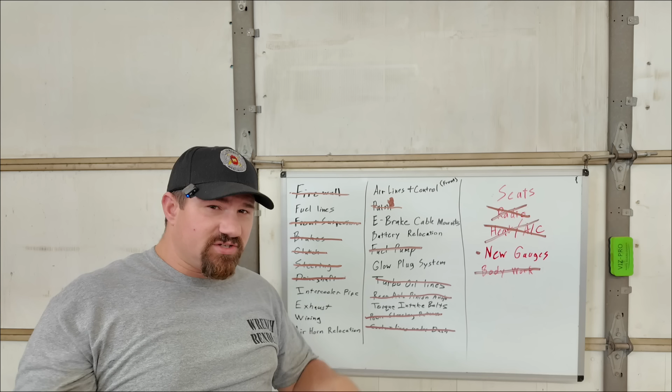So this list isn't looking too bad, but there's more stuff if we get down to the nitty gritty. So we're going to talk about this list. I'm going to give you a walk around of the current condition of the truck and what we're doing, and we're going to make a new list. So here we go.

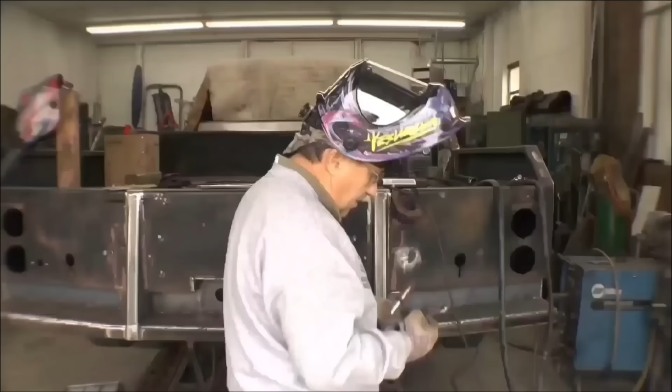Right now I'm in the garage trying not to lose my mind with everything I've got going on. There's a bunch of stuff that needs to be finished up, and obviously we're not there yet. I'm working on a bracket over there. I've been busy working so much and haven't been filming a whole lot because I'm trying to get stuff done in a time crunch. I need to remember I have a YouTube channel and people want to keep up with what's going on, so I'm going to walk around showing you guys a few things that are currently happening. We're going to talk about the list and make a new list.

So this right here, and this right here, is just as a guide. This isn't part of the bracket. I'm just kind of using it to... I got to make a battery bracket.

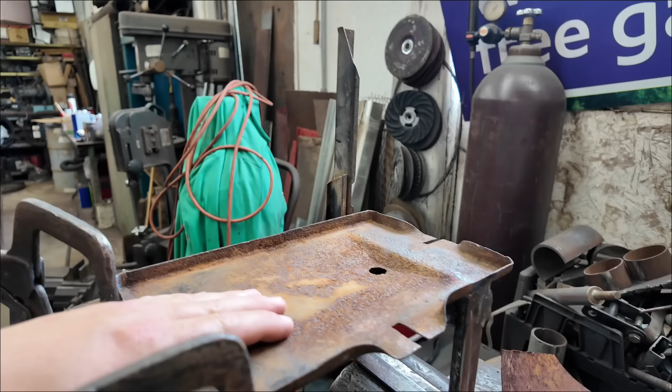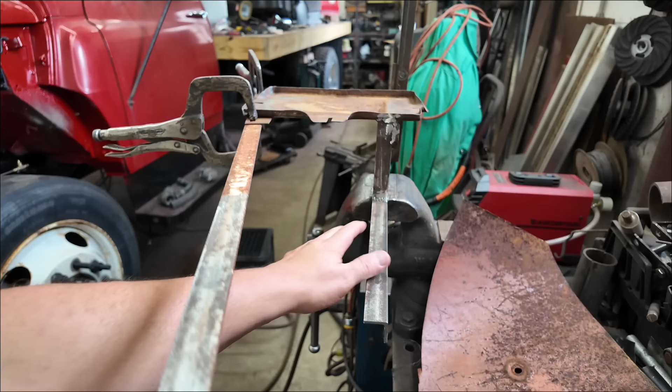Now when I say battery bracket, this is the tray of the original battery, and I'm actually going to leave it - we're going to reuse this tray. But down here I'm going to make another tray that sits down in the... well, imagine this is the line of the hood right here, and that's what this is up here for. I'm going to make another tray that sits just down inside of that, about 5 inches lower than the old battery. And that way I can set 2 batteries right there in that corner.

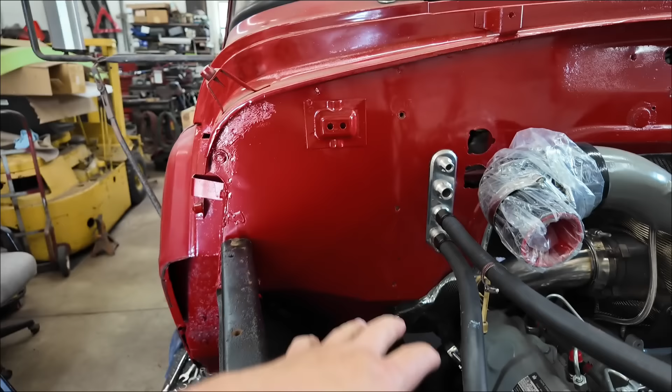To give you an idea where that corner is, that corner is right here. So old battery up here, new battery right here - they're both new batteries - and then this right here will tie up like that to keep it from being in the way. And then I'll have 2 batteries over here to run the diesel engine.

I went to put injector lines on and found out that the rubber boot I had for the turbo intake is too big and it's going to be a problem. So that can't happen. I had to make a turbo hat, and that garbage I made is because I should have clocked the turbo, and I can't go back and change that now. That turbo hat's out there on the ladder, dry, and I painted it black. Yeah, so I'll be running the air filter that came off my Duramax.

So yeah, I got my return lines all done for the injectors. I don't have the injector lines on because I can't right now until I get that turbo hat on, and I can't put the turbo hat on until I get a new one of these. This one's too big - it's serving the function right now, but as you can see, it's bottomed clear out. It's just not going to work, and as a matter of fact I can still turn that in there, and that clamp shouldn't let me do that.

So I've got a different one of these coming to get this on here to stay. And then that will kind of run up like that, and this boot right here is going to turn up a little bit and come over and send the intercooler line down in this corner. A lot going on with the intercooler thing, and I'm not sure how this is going to go. I may end up changing a lot of this later on. We'll see.

Fighting the battle on hydro boost because I got this one to work. This is my return - I need to change that end of it down there. I am not happy with it at all. It's kind of rubbing the frame and it's too tight there. So this right here is just a rubber line that goes into here, and I need to change that some.

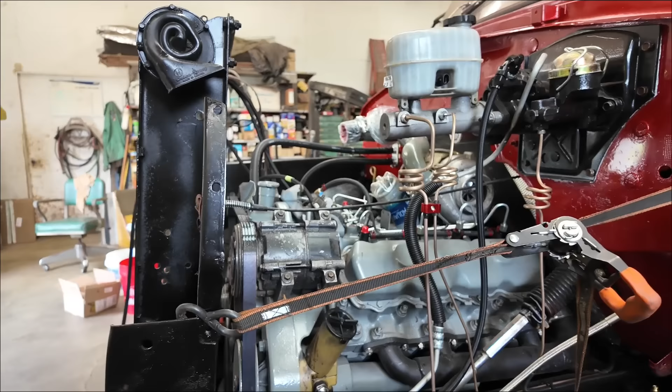So all this is coming together. The brakes are done - I think I went over that in a previous video. The air lines still aren't done yet. I'm going to have to drill holes up in through here to put the air lines in, that way I can get them in the cab for my pressure gauges. And then the other lines will run back under the cab because I've actually still got my manifold that's under the seat, and we're not going to open the cab right now.

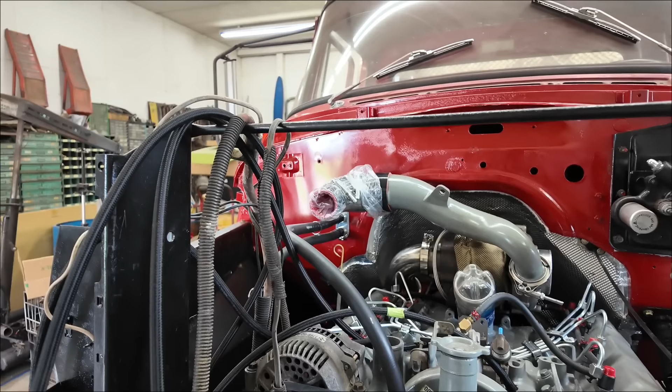What else we got going on? I'm waiting on that, I'm waiting on that. Right now I'm waiting on a hose for this. I kind of re-welded this in down here, and it's going to come out through here into my radiator, and that's going to be a whole different problem.

I've got some 90 fittings coming for the fuel pressure regulator, which I've got mounted in here. That's why all these hoses are hanging here. I've got to put two fittings, one on each side here. Actually, you can do it with one and tee it, but I'm going to do one on each side, and then my return through the bottom. That's what these are - my pressure and return from the tank.

I need to go ahead and cut that fender out right there. It's actually too tight, so I want to cut that and grind it down smooth and make it nice. Then I'm going to put a cover over top of those lines. You can see that they run alongside the outside of the frame down through there. So it's going to work out all right.

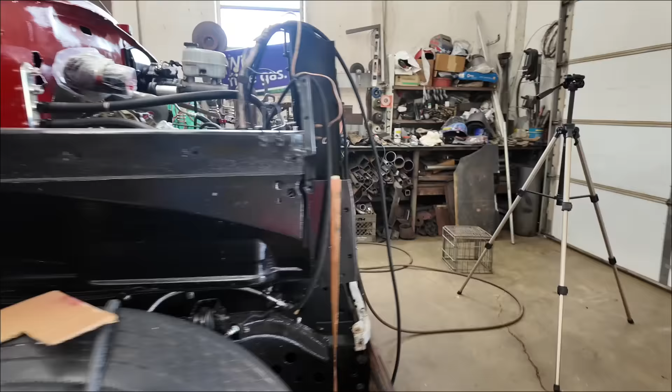I'm using the original Loadstar tank that we had. There's my fuel setup all plumbed in the way it's going to be, with the pump and everything. I don't have it wired yet, so that needs to be wired. The tank fill is still right here on the outside of the truck. Where this was gasoline, this will now be diesel, so it's a draft tube. It doesn't care - the tank's been cleaned out and dried out for a while now. We've had it empty and blown out. It's been empty for months. It'll be fine.

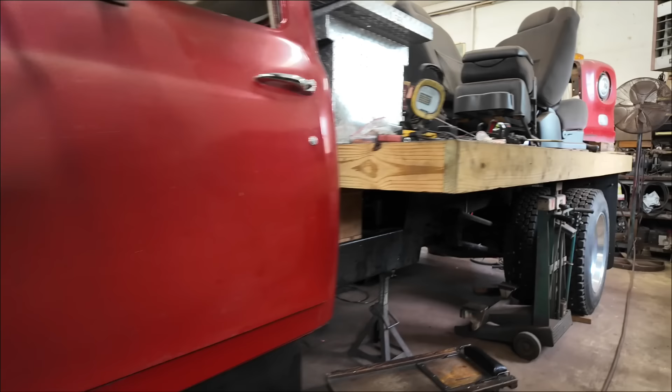Something I didn't get on film because I was kind of quick trying to get it done - come underneath here for a second. Got my name there on the drive shaft, because we now have a balanced two-piece drive shaft with a modern carrier bearing that actually connects to the dump truck transmission and comes back and connects to the GM one-ton axle. So definitely excited about that.

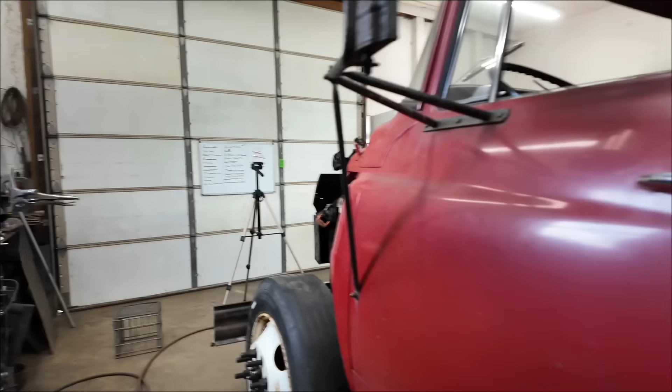That's a Driveline 1 in Columbus, Ohio - they hooked me up there, got that built for me. Them boys didn't ask a whole lot of questions. I said, I got this monster U-joint, and we're going to try and get this done, made this way. And they went, okay. So we're going to take a minute and look at the list.

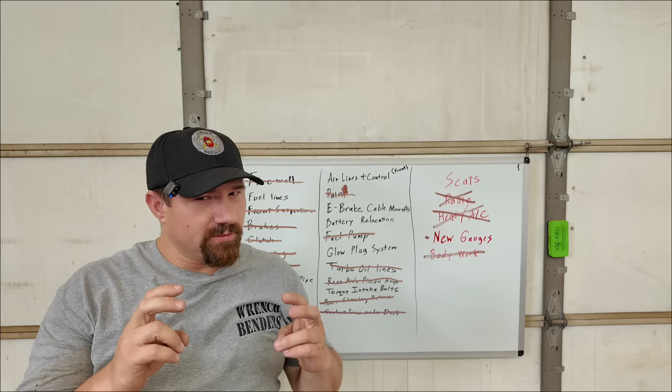I have worked pretty steady for the last little bit, and as you can see, a lot of these things are marked off here. But it's getting so busy that now I'm losing my place, and I need to add a few things to this because I'm afraid I'm going to forget some stuff. I need to mark which ones have to get done for the trip. Some of them seem kind of not real important, like they shouldn't take that long, but they need to happen. So let's see here, movie magic...

Okay, that looks a little better. Now that we've got a bunch of the other stuff off here, it's not as busy - we can see where we're at. I've got the new gauges. Dad did cut the sheet metal for the panel, so I've got them to really fit. I don't have any of the wiring to them done.

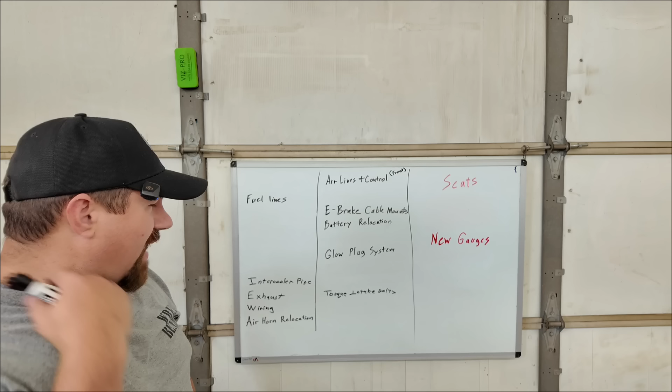Seats - I wanted to slightly modify, but we have to put them back in if we don't do anything else. Airlines and controls for the front - the back's still pretty well done, I didn't change any of that, but the fronts need to be completed. I got to make the e-brake mounts. The battery relocation I'm working on. The glow plug system needs to be made.

Torque intake bolts - I erased some of that, messing up, oh no, I'll have to write that back. I know that seems kind of minor, but when we get to the point where we've got the brackets built off of and everything, we're going to torque those bolts and make sure they're torqued. Because if I forget to do that, that would be bad. Right now it's the only thing on the engine that's not torqued to spec.

Air horn relocation, I've started. Wiring is obviously a big deal. Exhaust - I've got most of the pieces for that. Intercooler piping is going to be a disaster. And fuel lines aren't done yet.

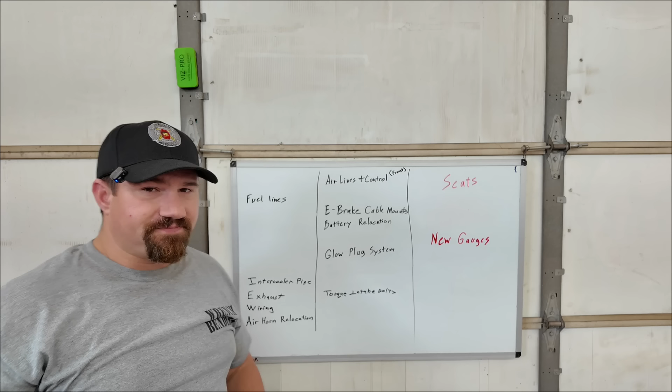So now I need to add some stuff to this list. Okay, so I've added a few things, cleaned some stuff up. The seats are over here because I had them over there because we might modify them. But even if I don't modify them, they have to go back in. Fuel line's got to be finished.

Sensor wiring - this is oil pressure, water temperature, pyrometer, boost gauge, which the boost gauge is not really wired, it's going to be a tube, not a sensor. But anyway, regardless, I've got to get it all set up to where I'm getting everything to the dash since the dash is now made.

And then the crankcase vent's got to happen, because by doing away with the CDR valve that's in there, now I don't have any kind of crankcase ventilation, and we're going to try and maybe take it back into the intake boot. I don't know yet, we'll figure that out.

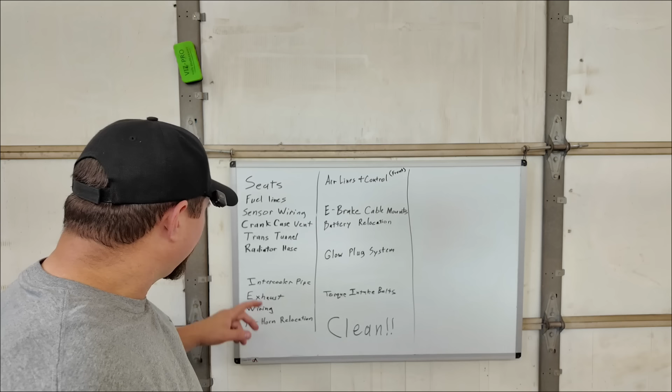Trans tunnel's got to be finished. I finished the firewall and finished what we'll call the doghouse, and I got the tunnel to where it's mocked up and all rough and raw metal. Matter of fact, it's laying back over here. But I've still got to finish up the edges of it, make it look pretty, and paint it. I guess I could just put it on the way it is for the trip, and that might be something that happens, I don't know yet. I'd like to finish it up, insulate it, and do that kind of stuff.

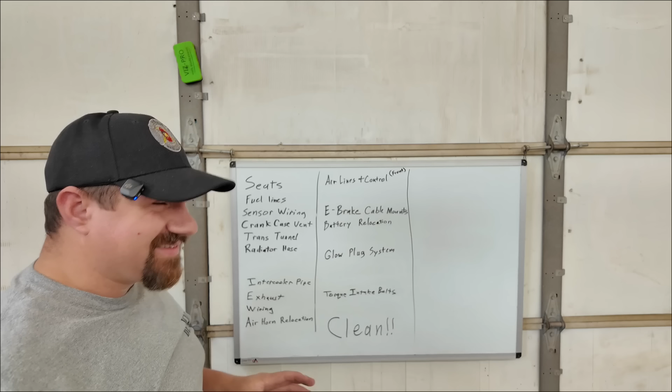Radiator hose - I know that sounds simple, and I've got one hose that should be perfect, that'll be done. The bottom hose is a booger right now because of the location it's in and how short the line is going to be. I may end up changing what I've got coming off the motor. To be honest, I'm not entirely sure yet. So that one we've got to solve - that one's going to be a problem.

Intercooler pipe is still on there. Exhaust still on there. Wiring still on there. Horn relocation still on there. This side is all the same - I didn't change anything over here, I just added some in here.

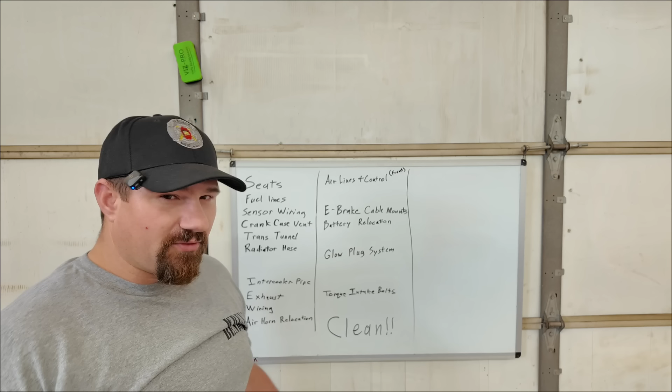And then, of course, clean - we got to clean the truck. It's filthy. The inside is filthy, the seats are filthy. It's been sitting in the garage where a bunch of grinding and welding and painting and everything else has been going on, and it's just dirty. So we have to clean it before I can actually take it anywhere. Not necessarily because I'm afraid of being seen in a dirty truck - the windshield's so nasty that the first time I get caught in rain, those windshield wipers don't have enough oomph to clean it off. It would be dangerous. So we got to clean some stuff - a good bath inside and out won't hurt anything.

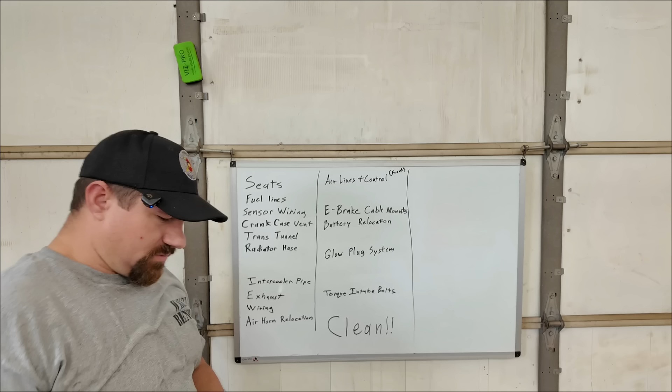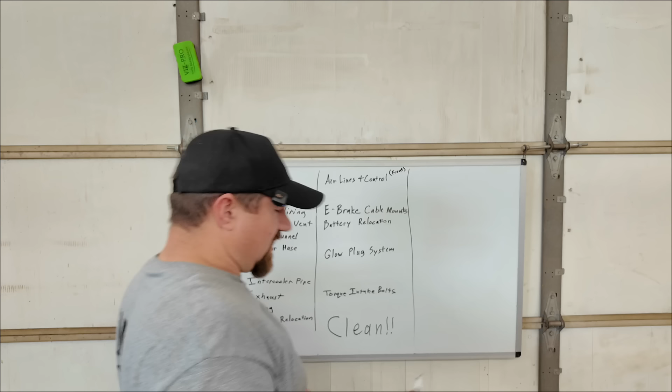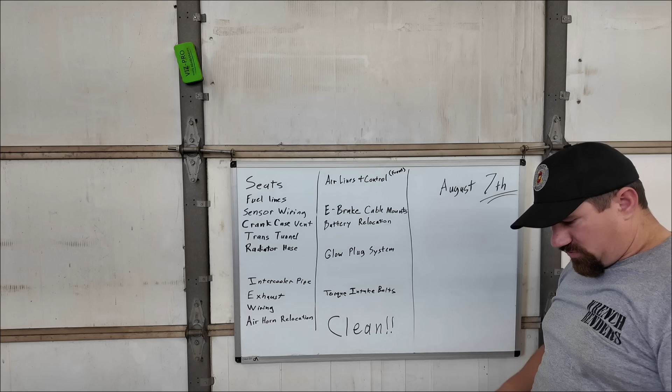Outside of that, this is where we're at. Hold on, I don't have my thing open. There, 12th - it's the 12th. It's currently July the 12th, so we need to have this done by August the 7th. That's the day we are supposed to drive out, right there. So with July the 12th, as you can see, I've only got a few weeks left to pull this off.

Okay, August the 7th. Now let me tell you the importance of having a list. If you're thinking about starting a big project, there's a bunch of tips I can give you. If you're taking something apart, use freezer bags - write on every little piece, put them in a bag, put it in a bucket, that way you know where it came from. That's going to be one of those things - I've got my bucket over there with the inner fenders and all the other bolts and stuff we took out. You've got to know where it came out of to put it back. And I know you think you'll remember - you won't. If you do, your memory's a lot better than mine. So that's a nice tip.

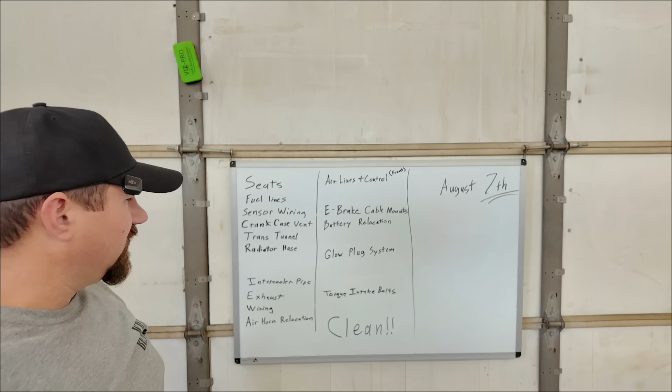But one motivational tip is have a list. Sit down, think about it, create a list. Because right now I'm losing my mind - I feel like there's an avalanche of stuff to do, because I'm sitting here looking at a truck that is nowhere ready to take out on the road. And it's just like, I'll never get it done, I'll never get it done, I'll never get it done. I've still got a lot to do, and I might not get this done on time. But until I actually put it somewhere - a piece of paper, we got a whiteboard here in the garage - until I put it somewhere where I can keep track of it, it becomes this big hairy monster that I can't define. But once I can define it, I can pick something on that list and work on it.

And then come back over here to the list and mark it off. And when I can mark something off the list, that makes me feel like I'm being productive. And nothing's more terrible than yesterday - yesterday I came in here and worked all day and built stuff and had problems and solved stuff that wasn't even on the list. And at the end of the day, I couldn't mark anything off the list because I didn't have anything done. I felt miserable. But at least I was working towards something that was on the list, and I found problems that I didn't even know I had to put on the list.